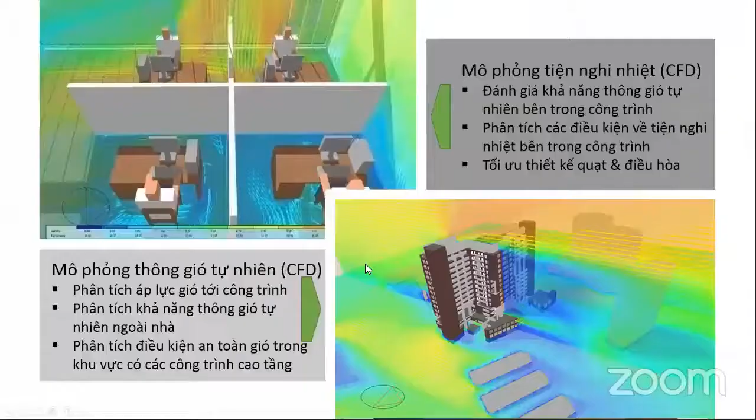Là một thành viên của VGBC, tôi đã tham gia rất nhiệt tình vào trong các hoạt động của các dự án và các công trình ở Việt Nam.

Một số khách hàng nổi bật của chúng tôi thì mọi người có thể thấy gồm có rất nhiều những đơn vị có tên tuổi và phổ biến trên thị trường Việt Nam, ví dụ Capital House hay Sao Thái Dương, Viglacera, hoặc là chúng tôi còn làm các dự án cho UNDP. Đây là một số đối tác của công ty như Heerim của Hàn Quốc hay là Obayashi Việt Nam, một công ty có nguồn gốc từ Nhật Bản.

Trên màn hình là hai công trình tiêu biểu mà công ty đã tham gia và tư vấn, đó là tòa nhà North Star được chứng chỉ LEED Gold và trung tâm lưu ký chứng khoán Hoàng Quốc Việt Hà Nội.

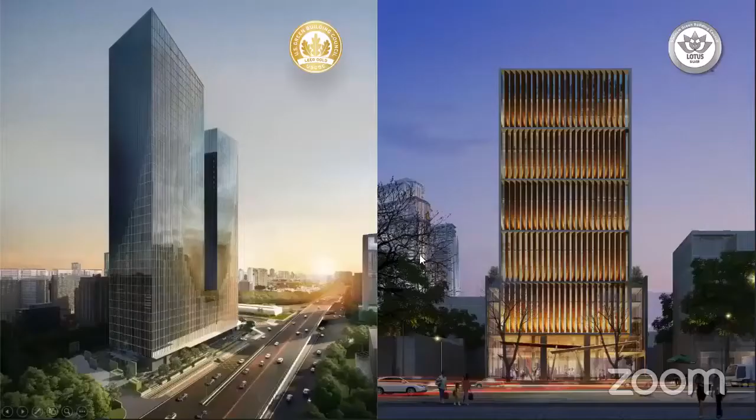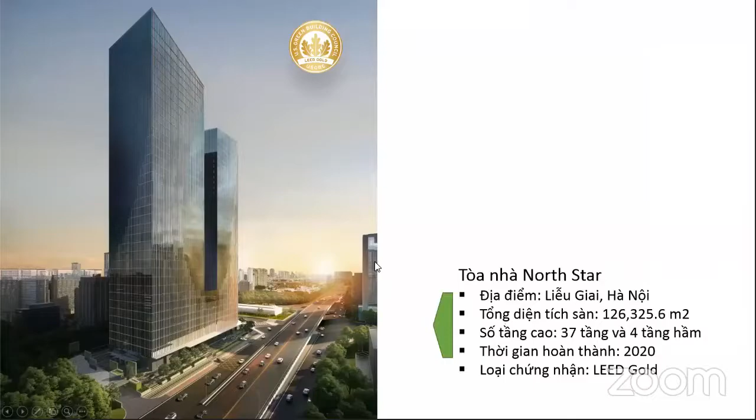Bên cạnh phần về công trình xanh thì công ty Vilandco còn là một đại lý và trung tâm đào tạo phần mềm. Chúng tôi có một số phần mềm như trên màn hình có thể thấy, chúng tôi làm đại lý chính hãng và phân phối cũng như đào tạo cho Graphisoft ở Việt Nam, có bộ phần mềm Graphisoft Archicad, BIMX và BIM Cloud. Ngoài ra chúng tôi còn có một số phần mềm khác liên quan đến phần hiệu năng công trình như Design Builder hay Energy Plus hoặc IESVE.

Nói về Graphisoft thì Graphisoft là một thành viên của tập đoàn Nemetschek, và bên trong tập đoàn này thì hướng tới ngành công nghiệp, ngành thiết kế xây dựng. Các phần mềm của Nemetschek bao phủ tất tần tật các giai đoạn trong một quá trình xây dựng, từ thiết kế, thi công đến vận hành công trình và bảo dưỡng.

Mọi người có thể thấy Graphisoft đóng góp vào trong tập đoàn này với những phần mềm ở giai đoạn thiết kế, đó là các phần mềm ví dụ như Archicad, một công cụ BIM chuyên dụng cho vấn đề thiết kế.

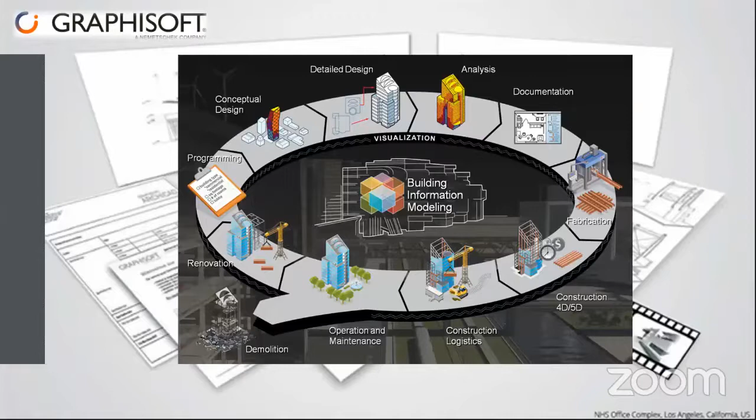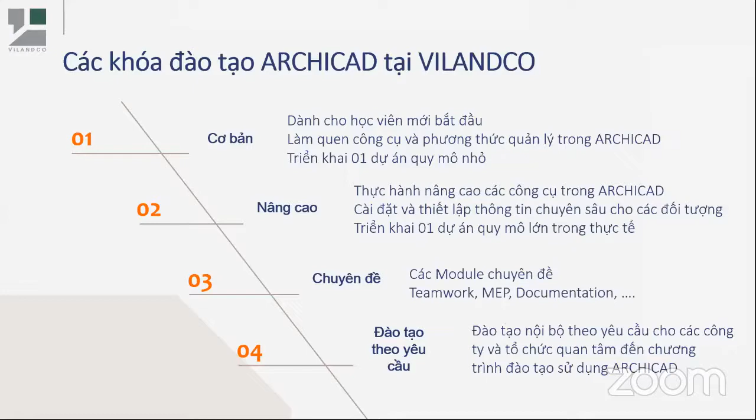Trên màn hình là giới thiệu sơ bộ về website của Graphisoft ở Việt Nam do công ty Vilandco tổ chức. Ngoài ra liên quan đến phần đào tạo thì công ty Vilandco có tổ chức các khóa đào tạo từ cơ bản đến nâng cao chuyên đề, và thậm chí là đào tạo theo yêu cầu cho tất cả các lĩnh vực trong vấn đề sử dụng phần mềm Archicad và theo đúng tiêu chuẩn của công ty Graphisoft. Ngoài ra công ty còn có thể làm đại lý để mọi người ở Việt Nam có thể tham gia các khóa đào tạo chính hãng do Graphisoft tổ chức.

Graphisoft có rất nhiều các khóa học, các khoảng thời gian rất linh hoạt, nên mọi người nếu quan tâm hoàn toàn có thể tham gia để nâng cao trình độ chuyên môn của mình. Việc nắm vững những kỹ năng mới liên quan đến BIM được Graphisoft đào tạo trực tiếp, khi hoàn thành sẽ nhận được chứng chỉ, và chứng chỉ đấy có giá trị toàn cầu. Ngoài việc nâng cao kiến thức thì cơ hội làm việc của chúng ta cũng tăng lên rất nhiều.

Đây cũng chính là lý do vì sao công ty Vilandco đã hết sức cố gắng để làm việc được với Graphisoft, tổ chức ra series 3 buổi hội thảo ngày hôm nay để giới thiệu về những khái niệm.

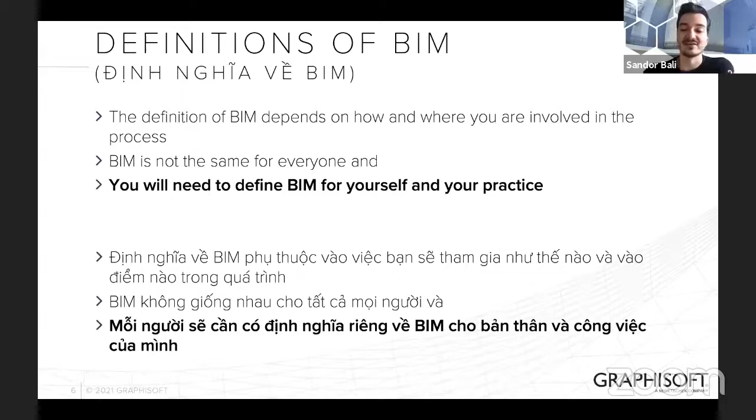Besides this, we should not forget about the basics when we think of BIM - it's a digital representation of the building. You can use it throughout the life cycle of the project, have deep collaboration with other stakeholders, share information, put in information, and extract information from the model. These all need to be considered.

And there are a lot of different dimensions of BIM. As mentioned, we always need to clarify with all the other stakeholders what our expectation is. Obviously 2D, 3D - we're all aware of what those dimensions mean. 4D already includes the time component, the time data, in our information model, so this allows us to create sequences, for example construction and site preparation planning.

In case of 5D, we include cost data in our information model, so that means we can use our model for cost management. And 6D includes operations and maintenance information of our assets. These are mostly clear, but after around 6D, 7D, things get a little mixed up - there are different understandings of what the dimensions mean. That's exactly why we need to clarify what we want with BIM.

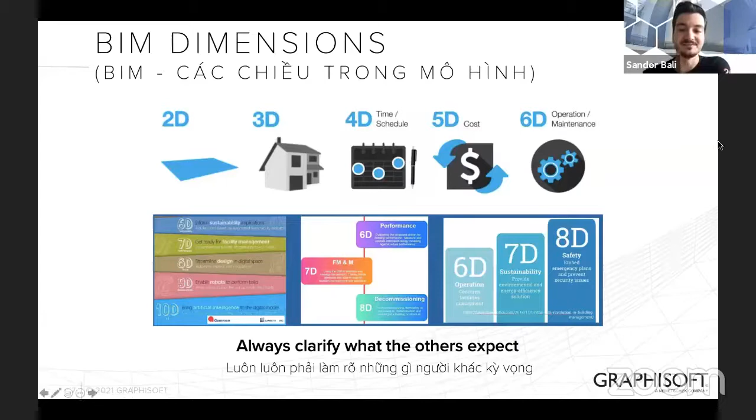I also mentioned, in case of the UK, the BIM levels, or level 2 - just for a quick understanding. Basically, level 0 BIM is not really BIM, there's no collaboration there - we have 2D CAD drawings, paper printouts, maybe electronic printouts, but no collaboration. In case of level 1 BIM, we already have some sort of collaboration, but it's typically 3D models or CAD work for the design, and 2D for the documentation itself.

But the real thing we're talking about, what we usually mean by BIM, is BIM level 2, when we have different discipline models that are federated together. Then we can use this federated model for coordination, collaboration, and interrogate it for model information as well. Level 3 BIM is already ahead of us, but it's not fully defined yet.

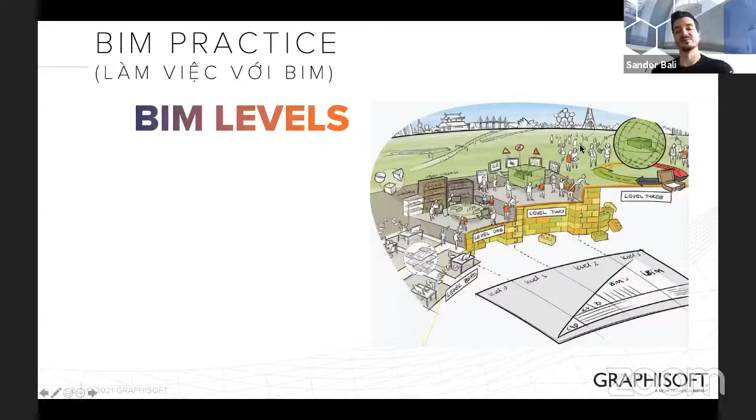In that case, basically what we would aim for is that there are not even discipline models, but there is a common database, the model, where everyone can work on the same thing - there is one single source of truth. But this is a little bit down the road, so right now the prevailing state is BIM level 2 in the UK.

Also, if you look at the practice, we need to look at the whole industry as well, and we need to see the harsh reality that the construction industry has not really been considered as one of the effective ones.

So here, as you can see, the different efficiency rate growth of the different industries in the last 50 years, we can see that the construction industry has practically remained the same, while manufacturing and agriculture have had a huge gain by utilizing new technologies.

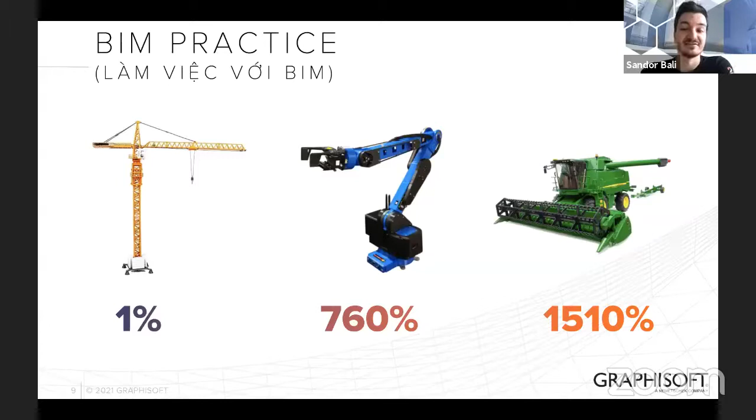So basically what we know is that the construction industry is less efficient. Because of that, we lose a lot of money on this. It's mostly because we have processes which take much more time than they should, and that is also happening because these processes are mostly manual, and digitalization is still not as mainstream as it should be.

The investment in research and development in case of the construction industry is around 1% of the revenues, whereas in case of the automotive industry and the aerospace industry, it's 3.5 and 4.5%. That's also the same in long-term investment. So in case of the construction industry, we do not tend to spend on information technology, even if the solutions are available, and even if the long-term benefits are clearly visible.

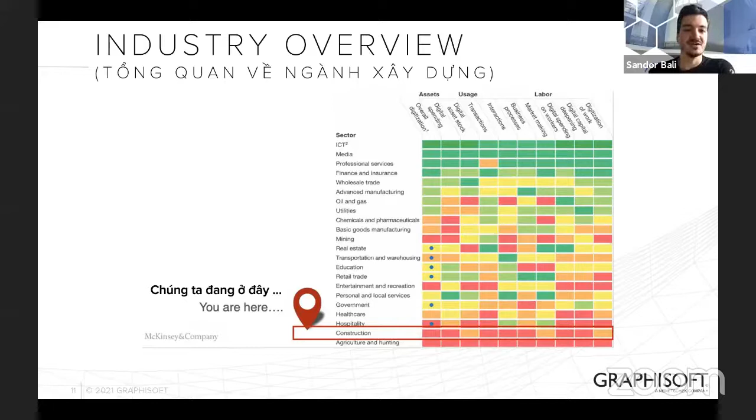On one hand, that's because there's a lack of standards. There are international standards, but in many places there are no local standards. In some cases, maybe the technology is still not available, or even if it's available, then hardware and software is not able to support the change. I think the biggest issue, or the biggest obstacle, could be the human factors and the mindset.

So obviously people need to change. If you just think about the average employee, they would say that they've been working with the method for 10-20 years, so why should they change? Obviously, if that method was not good, then they would not be using it for so long, right?

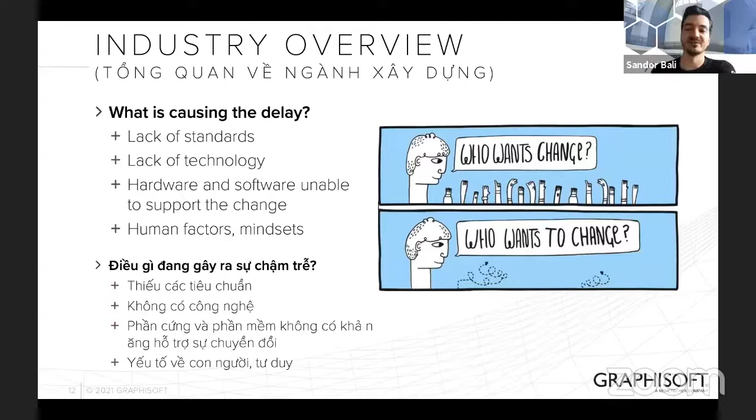But there are also many other human factors, priorities changing, and also, for example, the social map, the relation between the employees. That's also very important. I'm going to mention this later as well. So, but let's just move on.

Let's say we are already ready to do the changes, and if we have a BIM-enabled office, then we need to have an orchestrator for this whole implementation and this whole process, and that is the BIM Manager. So let's take a look at what they are actually doing, because it's not just the BIM Manager that is here, but there will be some other roles as well.

And even if you look at the BIM Manager, then we really need a superhero here, because they are involved in so many things, starting from the strategies of the company, the BIM strategy, the documentation of these strategies, the implementation of these, management, managing the teams, ITs, managing the project itself. They are involved in supporting the architects, the IT, or at least that's something that goes both ways, but they really need to work closely together.

They also need to be responsible for the know-how, training the people, onboarding new people, keeping up all the existing people, constantly developing them. And obviously there is also the actual work on the projects, the coordination with and the data exchange, information exchange with the consultants and other stakeholders.

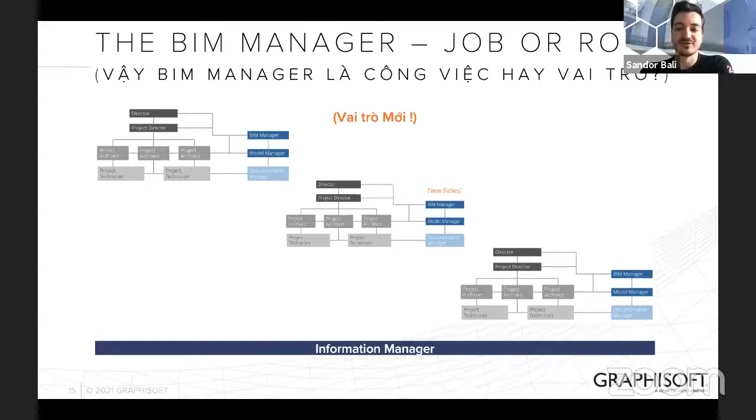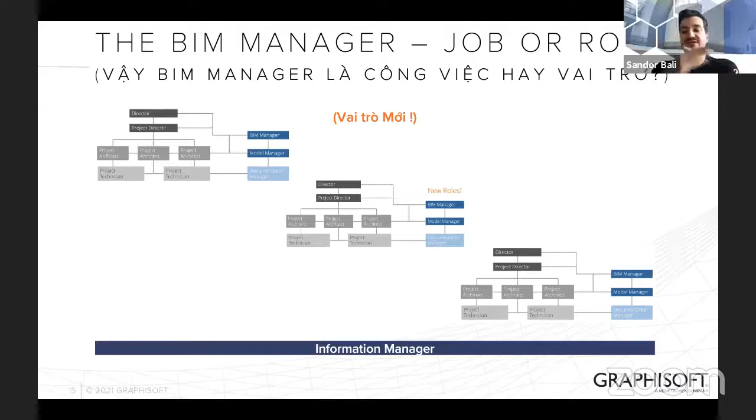And basically on a project level, ISO 19650 is introducing the project information management function, which also needs to have a dedicated role, which is the information manager. Typically this can be either a third party, a BIM consultant, or someone from the BIM department in the company. But it can also be the BIM manager who is involved in the overall information management throughout the project.

So what needs to be taken into account when it comes to BIM implementation? I already mentioned some of these factors: the human factor, the changing priorities, the social map.

As I mentioned, for example, in the case of the social map - in one of our case studies, a company was using ArchiCAD on an okay level, but not to its full potential, and they were not implementing BIM to its full potential. It turned out the reason was that the champion driving this whole thing was close to retirement, so they didn't really put in too much effort into the implementation. Also, everyone considered that person to be out of the company, so why should they really follow him?

This is just one example. There could be other cases when people just cannot work together. So as part of the planning in these BIM implementation processes, one of the goals could be to draw a social map as well.

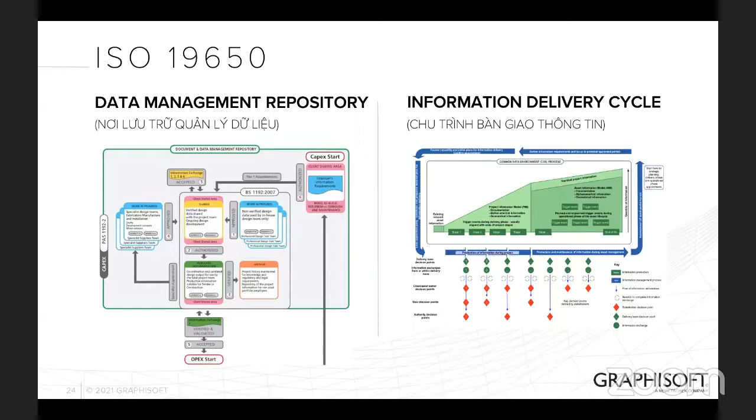You can actually look at this in the chat. It's the latest question. Yeah, I'm looking at it. It's quite a long and complex question. I'm just reading it again. Well, if it's too long, then we will answer it later on, because I think the break is almost over. Yes, maybe let's do that. Yeah. Okay. Okay, let me just go to. Okay.

So the next thing is about checking our project. Running project audits is the next step in the process, and there are a lot of responsibilities here. The most important thing to focus on is that this activity should be more proactive. We should be preventing issues from happening instead of trying to fix them after. Obviously, once they happen, we need to fix them, but the best is to avoid and prevent them from happening.

To achieve that, we would rely on our BIM manuals and the documentation of processes. We should have a template because that can make our deliveries consistent. It can include automation processes. We should do trainings, and all these audits should be both ad hoc and regular.

There are also a few aspects here. Let me move on with those, because I want to show you who should be taking these checks, and when and what kind of checks they should take, just briefly. So there are 4 kinds of audits or small checks that we can do.

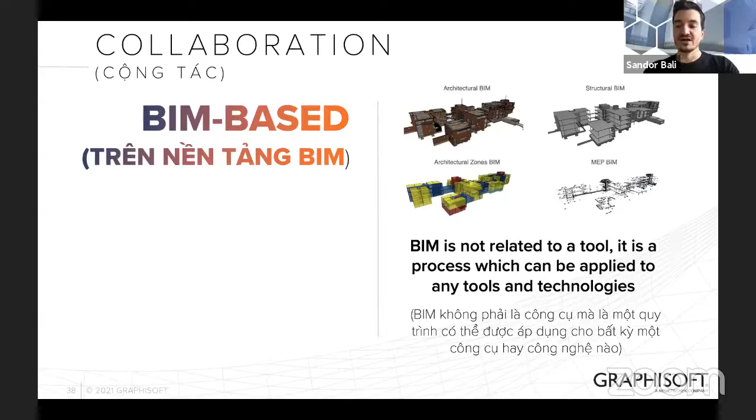There are a lot of restrictions, in the sense that maybe in certain regions or geographical locations you only have a certain solution, or any kind of requirement can come up which will eventually bring in different types of tools. So in order to come up with a solution, we would be thinking about open BIM, when everyone can use any tool that they want.

But there are all the other solutions where we want to provide a connection through an open format, which is the industry standard IFC.

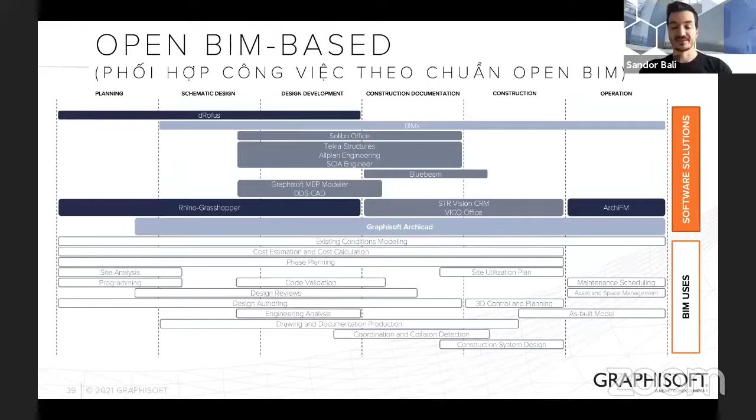Those disciplines will import it, federate it, do their own checks, coordination, collision detection, and then communicate the issues to the relevant parties. Once the parties get this information, they fix their models and the whole cycle starts again.

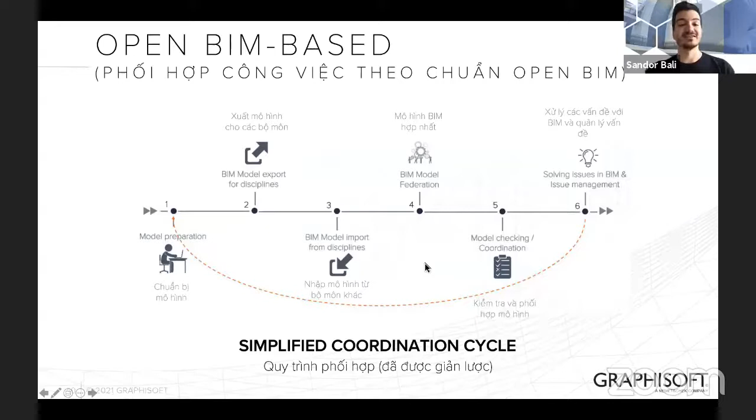This is a very frequently happening cycle, a very much iterative process, so it has to be smooth. What methods can we use here? We can always have a closed format, a native format, when we have a native file. But there will always be someone who has a different solution and cannot switch to a dedicated software package. So in the long run, having a closed format will not work.

That's why we are voting for Open BIM, and the only open format, IFC. Basically, if you have this open format and you're using open standards, then that's when you achieve Open BIM itself.

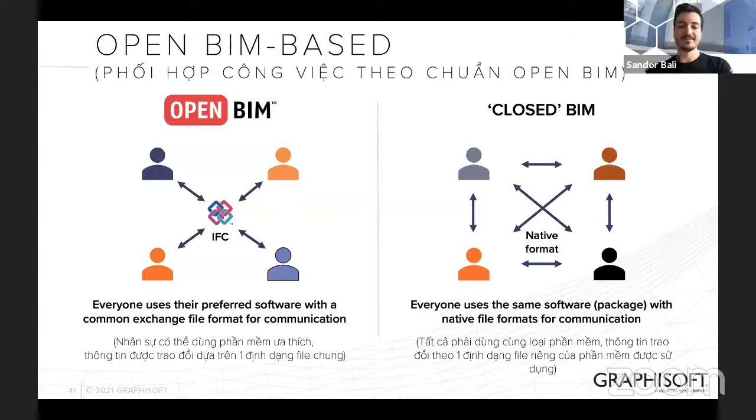Technically how this works, we're going to go into a lot of detail in the third session, the BIM project coordination. Maybe just to highlight a few things: in case of OpenBIM, we have three terms that are really important. First of all, the format IFC, which is storing the data, storing the information.

Then the model view definitions, which are really important to translate the processes into technical requirements. These are the settings which allow us to filter the information that we're exchanging, so we're only sending the relevant information to every stakeholder.

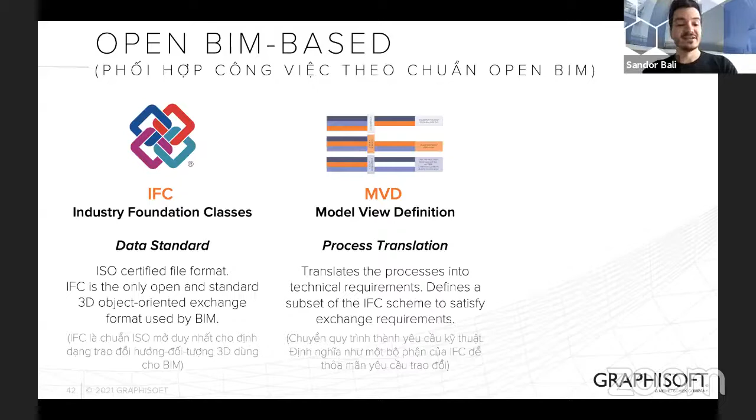And the third one is also another open format, the BCF, and I'm going to mention these later on today too. BCF is a BIM collaboration format that's for communicating the issues once the model is federated.

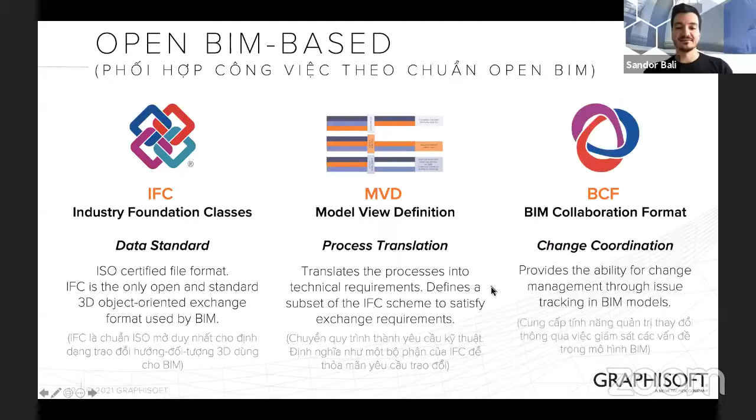There are a lot of OpenBIM uses and a few principles. During the course, you will be able to see these diagrams and descriptions and explanations on how the different parties participate in the different stages, how they coordinate and how they communicate with each other.

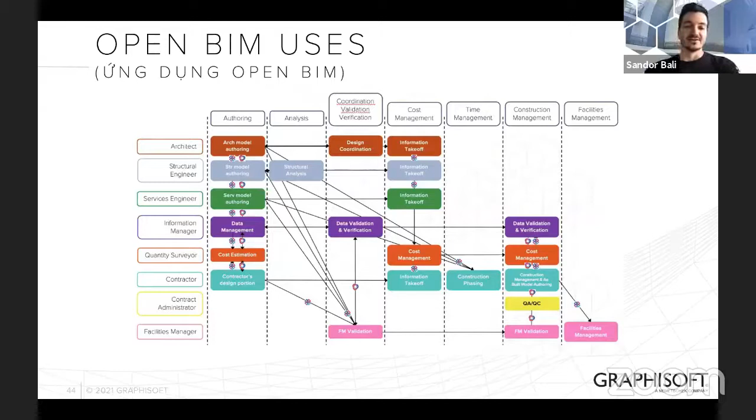And obviously, to make it more seamless, we need to do a little preparation beforehand. Sometimes depending on the software packages we're working with or where we are sending our model, we might have to come up with certain workarounds or certain solutions to make this exchange seamless.

And then maybe we have to differentiate methods and workflows. Again, these are the ones that should be documented in a BIM manual.

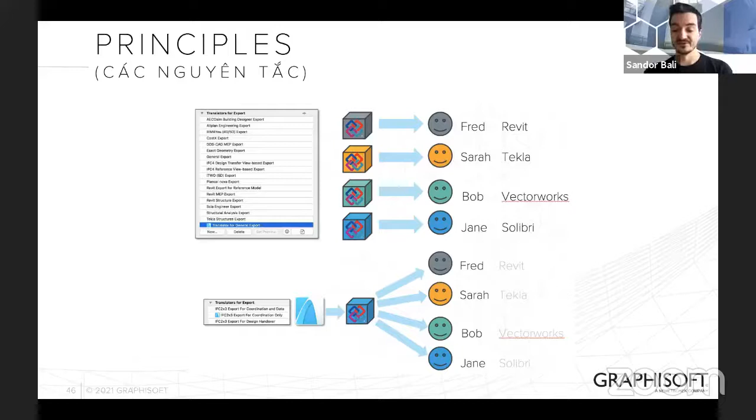So here are a few examples.

Purpose-based exchanges are typically these three: coordination and data, meaning the 3D geometry and the information. Coordination only is like referencing, basically just taking a look at someone else's model and using it as a reference. With new IFC versions, we're now talking about design transfer more and more, meaning you're transferring your delivery to someone else, handing it over to another designer.

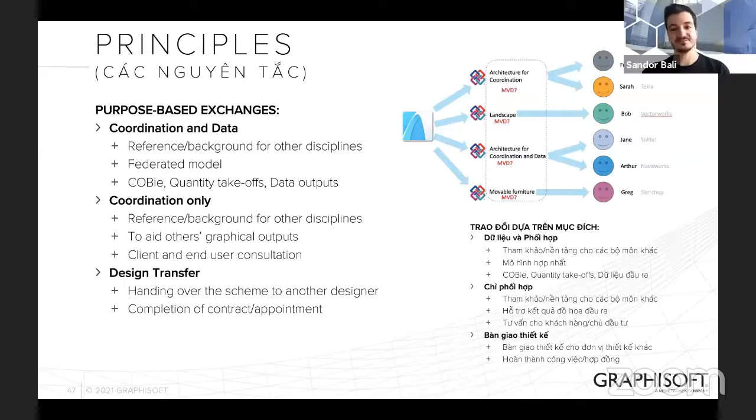As mentioned, we only want to transfer the relevant information. So for example, in case of a structural engineer, when talking about walls, we should include the structural function, renovation status, and maybe the type of material, but we don't necessarily need to include the color or type of finishes on that wall. We need to make sure the model is organized properly, with classifications and layers set up, so when the structural engineer looks at the model, they can easily find similar elements, interrogate the model for information, and reuse that information.

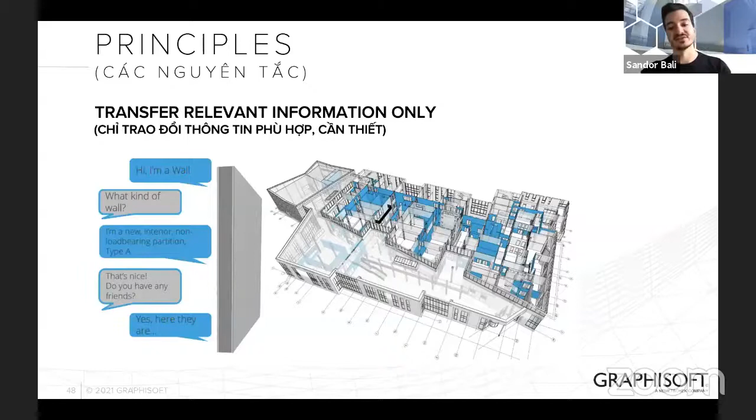Again, this is a very extensive topic, and there will be a lot more about this at the third mini course, and also at the actual course. Even in this first part, the actual course has a lot to say - one of the sessions is dedicated to this part.

Teamwork refers to our internal work - how do we work together with our colleagues within the practice? Graphisoft has its own teamwork solution called BIMcloud. The goal here is that we can work on the same project at the same time. It's a cloud-based design hub, meaning all other stakeholders can connect to it, work on materials there, and access the materials as well.

From a technical or implementation point of view, you can have a very custom version of your own if you have the related IT knowledge. But even if you're a small practice, you can use it as a service and subscribe to it as a zero IT solution, where you don't have to make additional investments.

So when it comes to teamwork, again, maybe just a few things to think about in planning: why do we want to share projects? Can we physically differentiate project parts and then combine them together with hot links, for example, or can we really work on the same content together with BIMcloud, or maybe combine the two together? How many projects do we have? What is the expected peak capacity? How many users do we have? How are we going to manage these users? What are the different roles people have on the project? Do we have to set up permissions and restrict access for certain roles?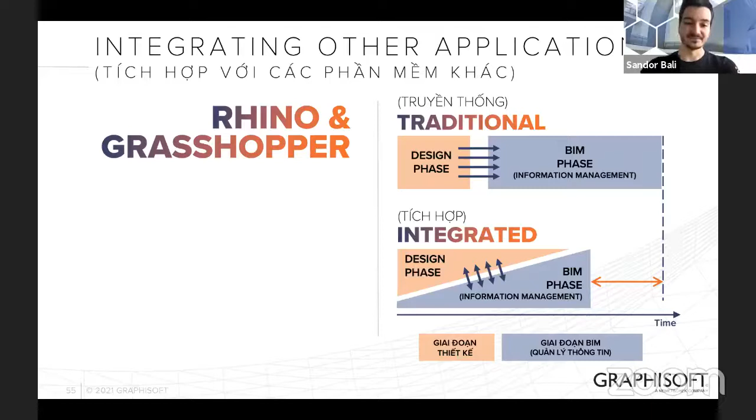Another tool I would mention, which I also showed in the diagram before, is dRofus, a requirement management tool. Usually the problem is that client requirements aren't documented well, or they're fragmented all over the project. So the design starts, and then we check if the design matches the requirements, but maybe there were already some updates, so it's hard to keep requirements and the product synchronized.

So instead of that, we're changing the workflow. Instead of model-driven design, we should think of data-driven design. What dRofus does is capture the client requirements, let's say from the exchange information requirements, and translate that into structured data. We can create a database in dRofus, and create the equivalent of that database within ArchiCAD, so the ArchiCAD data and the client's requirement data can always be kept synchronized.

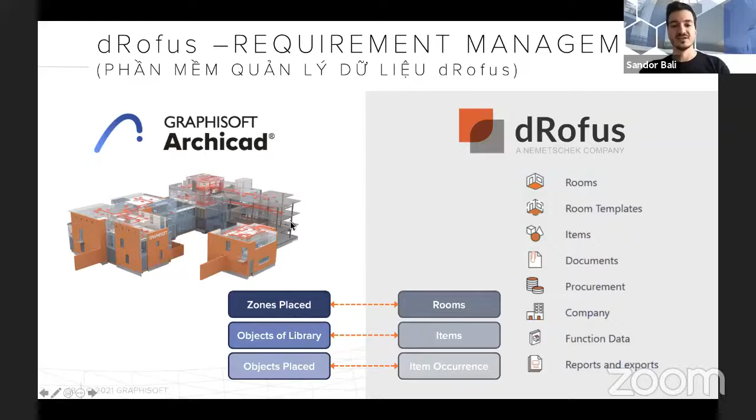Another tool we really love is Solibri Office, shown here within the process. Solibri's previous name was Solibri Model Checker. It's used to federate models and do visual checks, code compliance checks, or any kind of custom checks. You can set your own internal checks as well, or for example there are COBie extensions for Solibri on their website, checking if the information fulfills the COBie requirements. COBie is the data deliverable used in the UK and US for asset management.

So you can do visual checks, clash detection, code compliance checks, your own custom checks, and create issues from these, and create presentations that can be communicated to different stakeholders using BCF, the BIM Collaboration Format, as the transferring media. I mentioned BCF as well in the context of Open BIM uses.

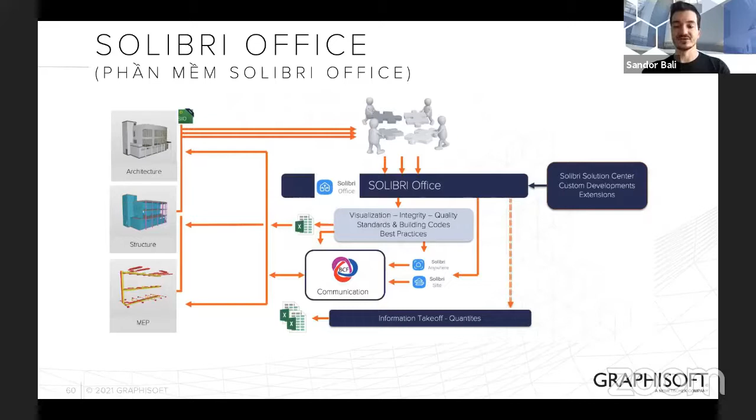There's also another great tool, Kubus BIM Collab, a cloud-based issue management platform. When you have these BCF messages or files, you can read them in most BIM authoring tools, either natively or with an add-in or extension. But in many cases you don't want to have the whole model open — you just want an overview of the issues, and you might still want to add comments, change responsibilities, change stages and the states and completeness of these issues.

So basically, with BIM Collab you can read all the BCF files and manage them. In ArchiCAD, we have a BIM Collab ArchiCAD connection, so you can work directly with these from ArchiCAD as well. This is an extra convenience on top of the system, but overall the system can be used with all kinds of collaborating software because it only handles the BCF issues.

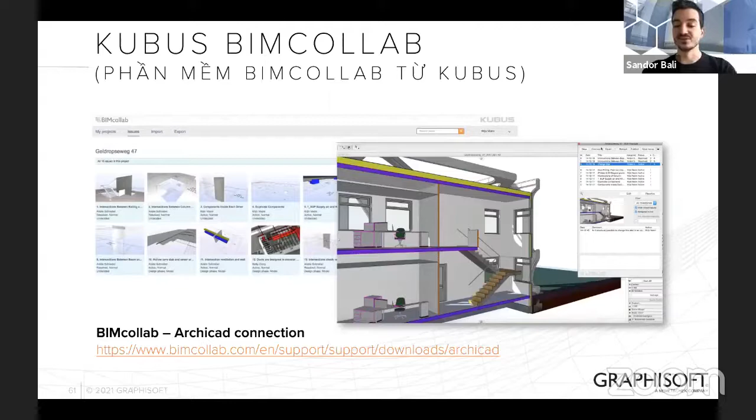And last but not least, I would mention the common data environments, which is basically the collective term to describe the platform that is the project repository. So you can have the project files, documents, drawings, models, other supporting documents, anything that is part of the BIM workflows.

Usually these common data environments have their own IFC viewers. So here, that's also a key thing. What you need to think of is that they're also using an independent platform, an open platform, an open file format.

They are mostly viewing IFC files. And in many of these, you can do quick or simple model federation and information queries. So this is also available in many cases, until a limited extent.

Even within the Nemetschek group, which is where Graphisoft belongs to, we have our own common data environment coming from Allplan, which is called BIM Plus.

And some of these common data environments also support the export of COBie data from the models, which is the asset data deliverable. So these common data environments are usually owned by the client, so they have to set it up, provide access for the consultants, and eventually everyone should be brought on board.